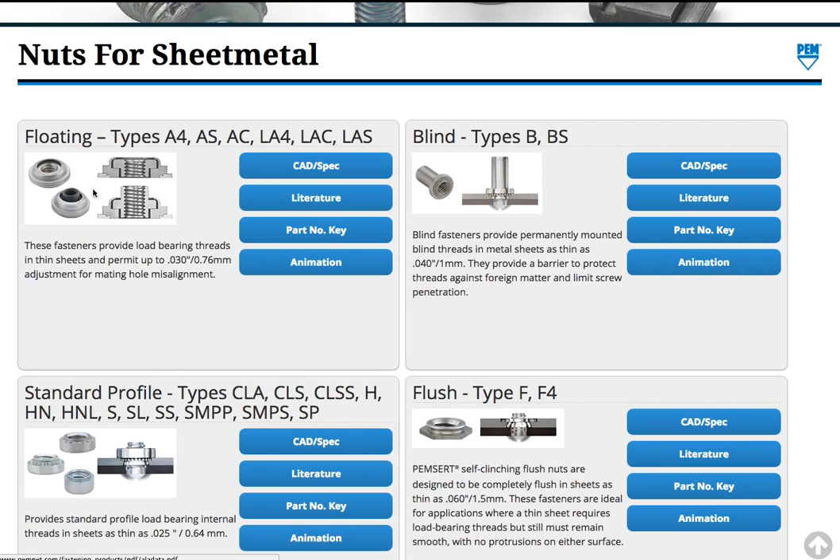And then these are floating. I know I'm rambling on fast, but there's a lot to cover, and you should just go and explore for yourself. But these floating ones are more interesting because they give you some wiggle room.

As you can see here, they can go in thin sheets. I forget what they qualify as thin sheets, but they permit up to 30 thousandths adjustment. That means when you line up your pieces of sheet metal, nothing in life is perfect, so when you design something, there's always some kind of tolerance. This allows you to be off in your tolerance by up to 30 thousandths.

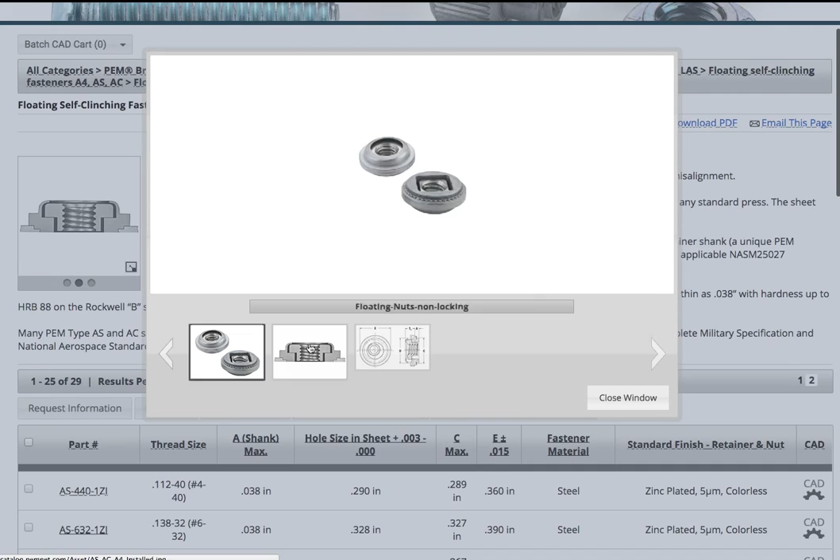The nut actually kind of wiggles around inside of this. So if I open this up, go in here, go into the unified section for the English stuff - I don't know how good of a picture it shows, but there's kind of an air gap around. This outside shell gets pressed into your sheet metal, and then inside, this can wiggle around by this much in all directions.

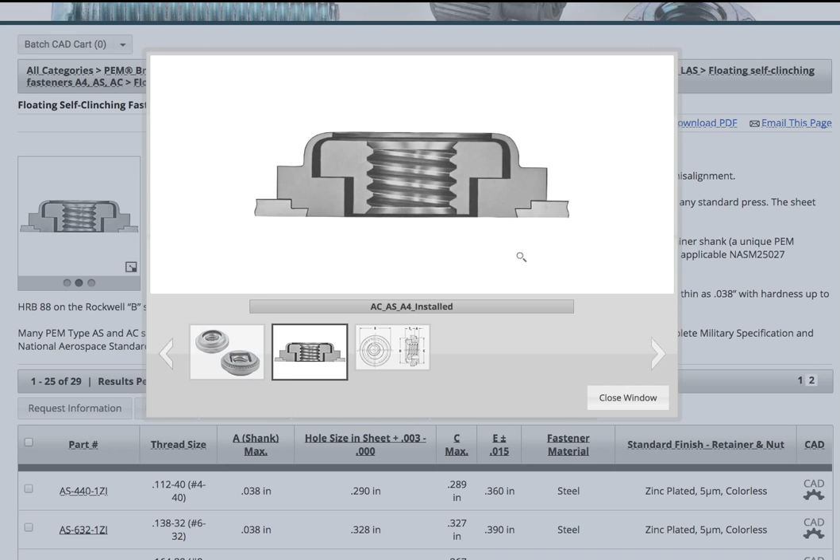So your tolerance can be off by a little bit and you don't have to worry about it. That can be a big concern if you're putting standard PEM nuts everywhere and you have a bunch of them far away - if something's off, some might not line up, and then you're kind of screwed. With hardware, it's a little looser because you might make your holes significantly bigger than you need, just to take care of any misalignment issues. But with PEMs, you can't do that. With these floating types though, it gives you some wiggle room. So they're pretty neat, just wanted to point them out.

Flush mounts are going to be perfectly flush with your sheet metal, which, as you can see here, sometimes you might not want something protruding up. As you can see, this can protrude up a good amount.

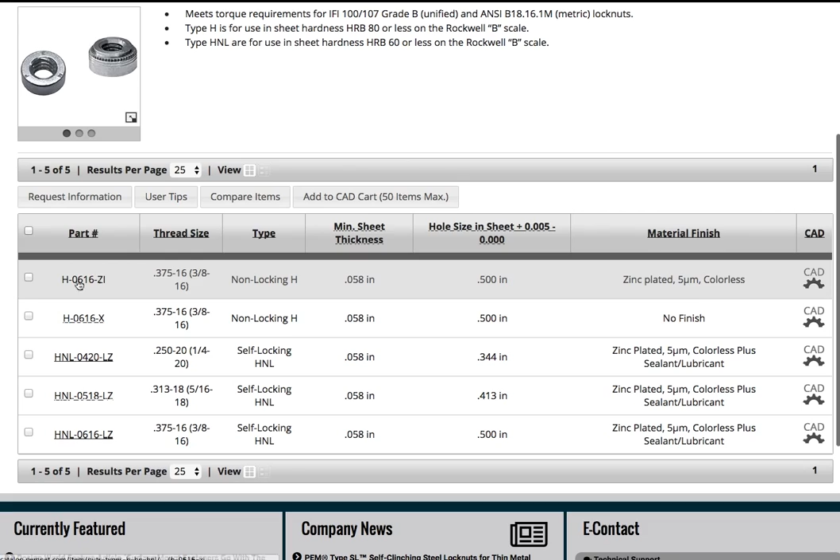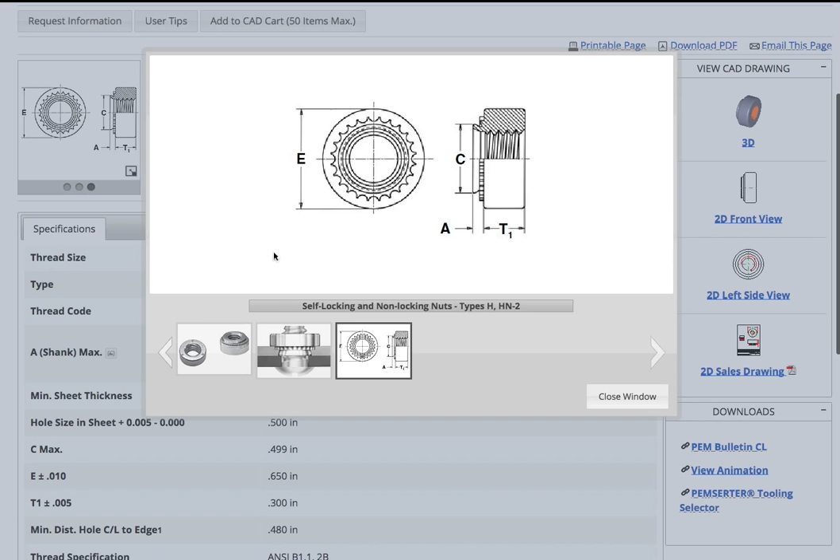If I go into their actual CAD stuff, go into the English system, and pick this one here - they give dimensions for everything. So if I open this up, this part gets pressed in, but this T1 dimension is actually going to be protruding up here above your sheet metal. If I go for T1 down here, that's 0.3 of an inch.

So it depends on what you need in your design. But if for some reason you can't afford to have that protruding, then you're not going to want to use this type - you're going to want to go back to the flush type. Go to F, go to unified, let's pick one quickly here. And they're going to be flush.

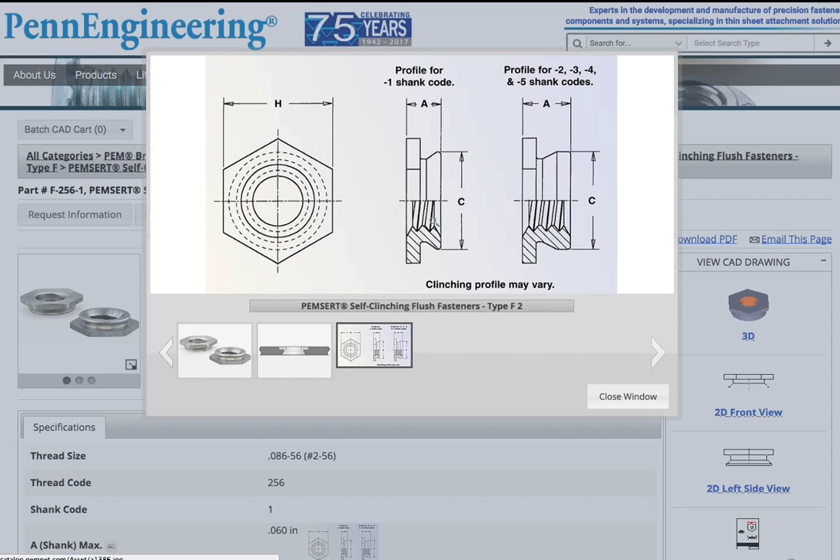You can see all the different dimensions here. Every single PEM is rated for some kind of sheet thickness, so these can only be used in sheet metal from 60 to 91 thousandths. And they give you a hole size that you have to mount it in, with some tolerance and stuff.

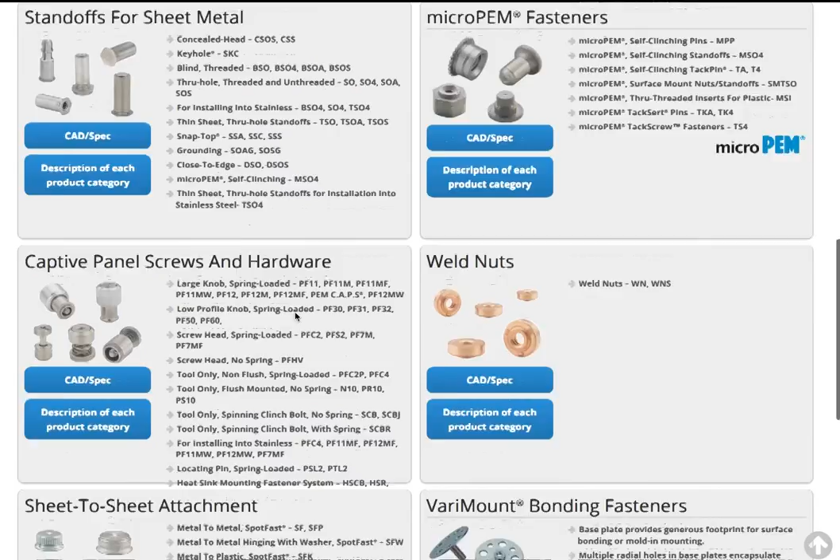You have a spring that presses your actual screw away. So if you want two parts that are mating and you want a thumb screw, and you want the screws to stay in there and not come out every time you take apart your assembly, this is a good option. You could make an assembly like this yourself, but this is an easy buy-it-and-forget-about-it solution where you're just press fitting these into your sheet metal, and now you have everything captive - this takes care of the nut, this takes care of the screw.

Now it's a little different. Again, I'm getting into the details here, but you need something to thread into for whatever you're threading into.

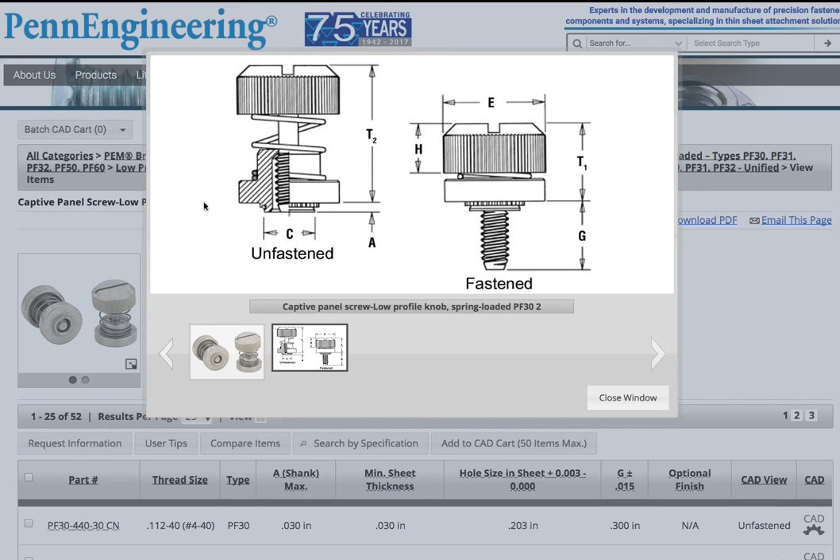Like you're going to have this in sheet metal, and there's going to be another part that has threads. Otherwise, this is doing nothing. But it's a pretty simple solution where if you need a captive threaded part, that's one thing you can do.

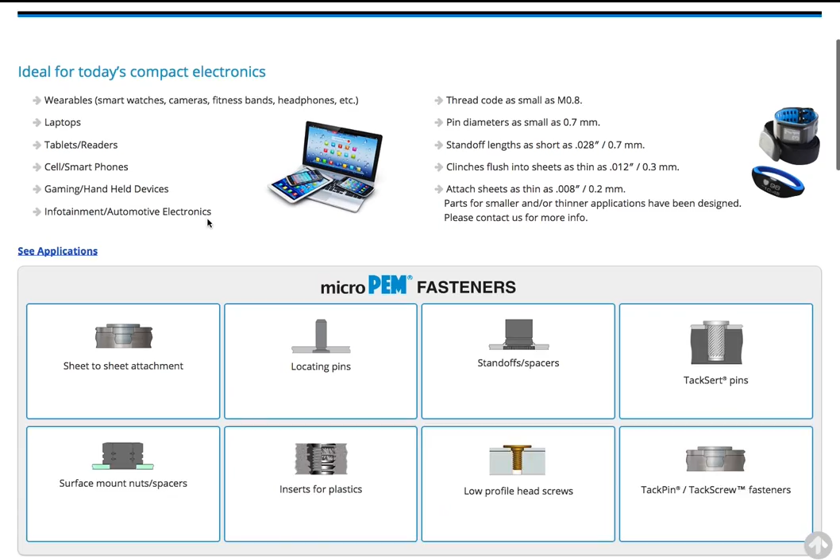I'll show you some of their other products here. They have these micro PEMs. I've never used these ones, I usually just use the regular PEM Fasteners, but these get even smaller. So I'll just go to sheet attachment, pick a random type. I don't know, I guess I'll just pick these, and I'll pick the first one.

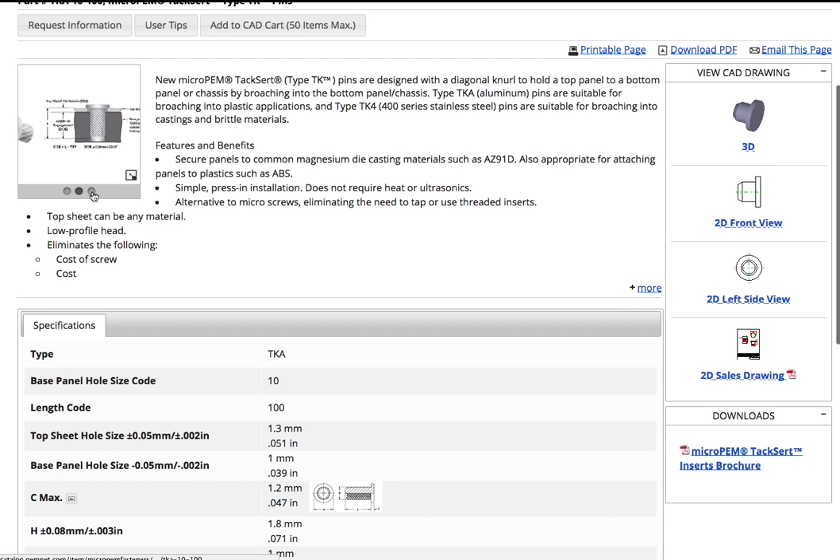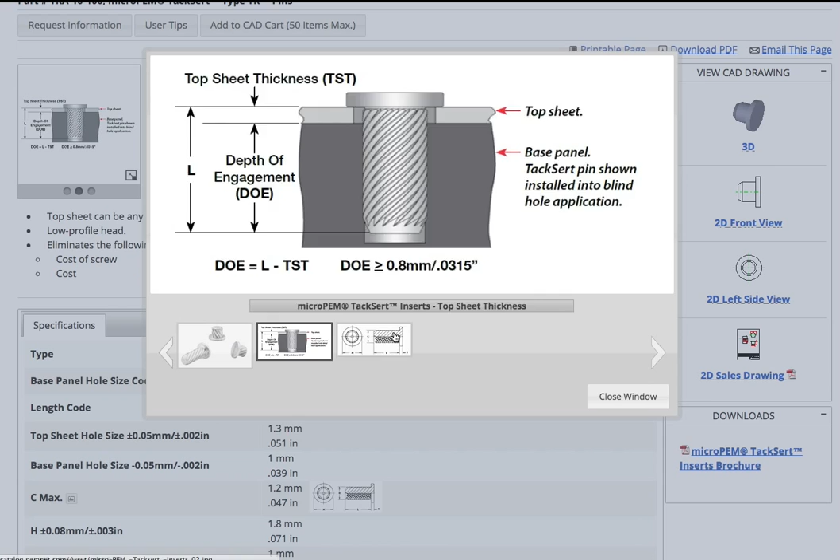So if I go into the pictures here, look up these dimensions. I kind of want to get a rough size of how big this thing is. So L is... actually, sorry, L is the actual length of it getting embedded. And then we have this part here.

Let's scroll down and we see that the L dimension is... it's actually kind of amazing. It's 40 thou, it's 1 millimeter long. And the H is 71 thou. So that's really small. If you think of a number 4 screw, what is that? 0.112, I forget the number, but this is teeny.

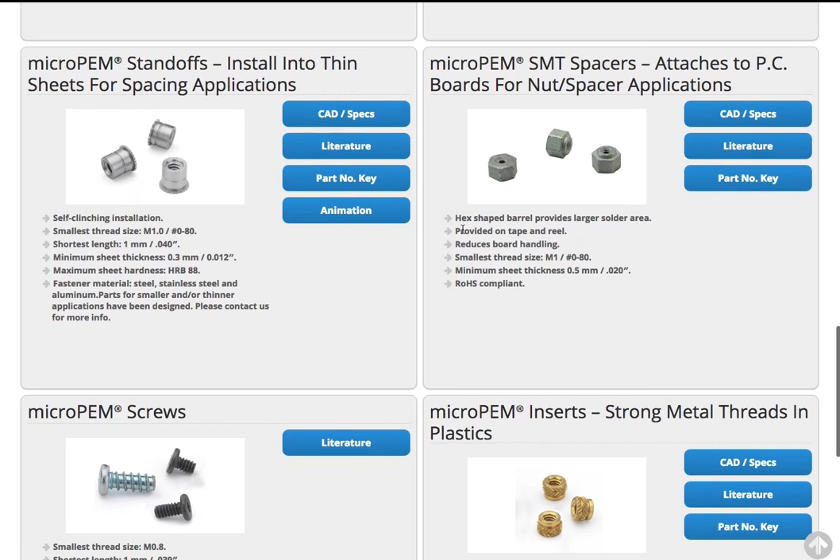If I go back, they have all these different essentially nuts, with different applications. They have screws, they have these inserts. And then up here they have this Atlas brand. Let's see, what are these? I've never used these ones either, but they just have a bunch of different products.

I think they have some of the companies they've bought, like these plastics components, where they bought this company or merged with them, and now they do them. They have a ton of different resources in here that go outside of just showing how they mount. They have this information, they show you how to design them, or design your system to actually use them.

One advantage is you have fewer parts to handle, fewer assembly steps, less assembly time. So those are kind of all related. If you have fewer parts, you're going to have fewer assembly steps and less assembly time. But that's really what these things are great for.

Whoever's making your part, you just tell them, hey, put a PEM fastener in this spot. And you'll get your sheet metal part shipped to you with a lot of your hardware pressed in, which is great.

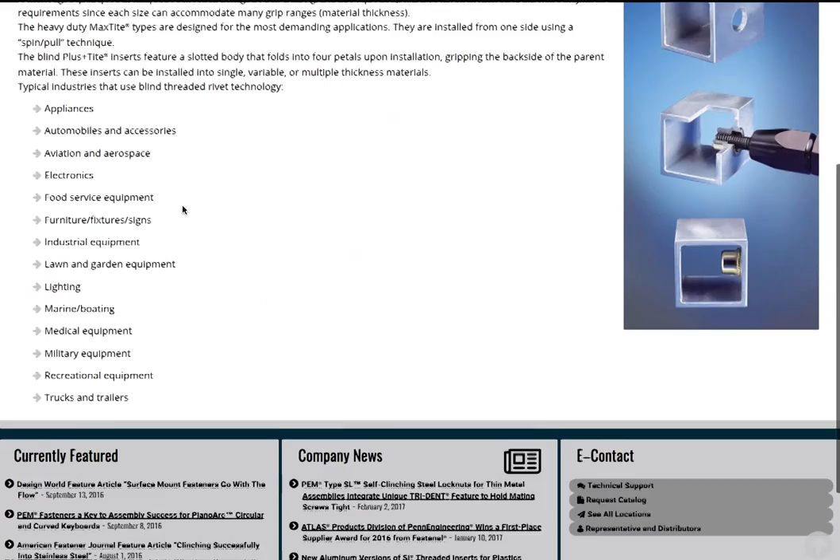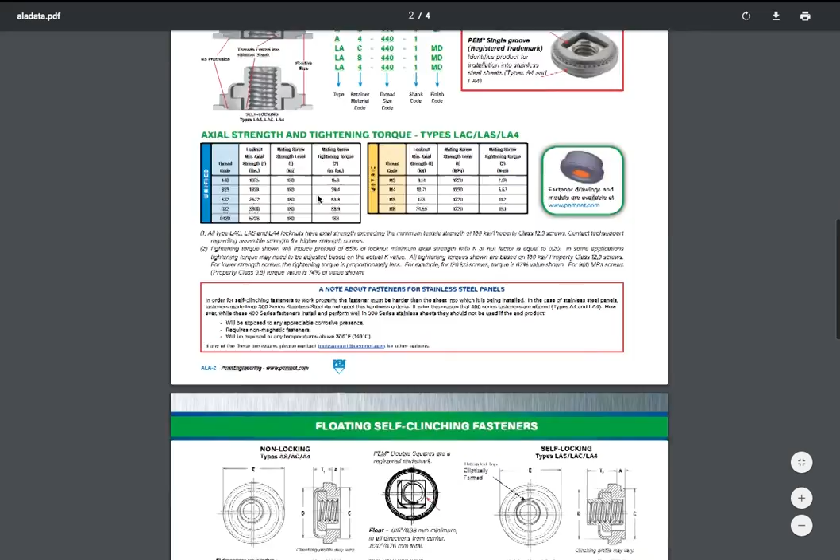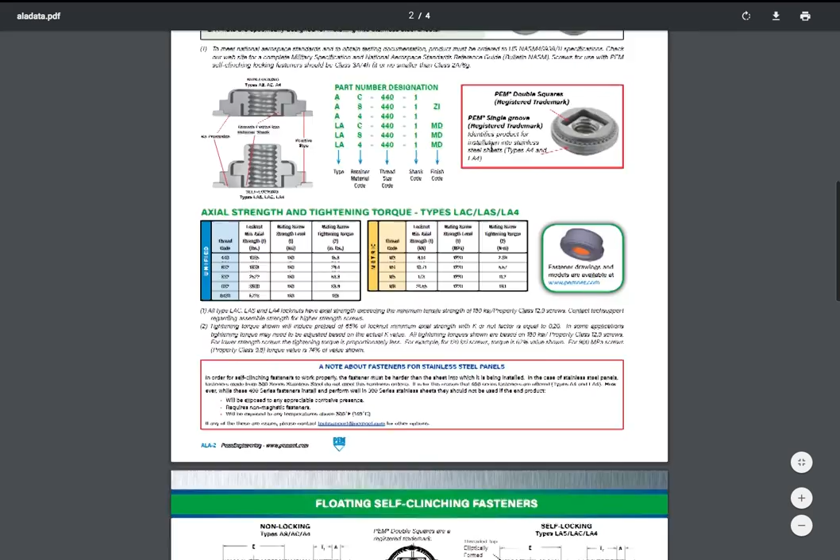They show some applications, and around here they show how they're actually inserted or drilled out. In literature, they have boatloads of catalogs and information. This was particular to floating self-clinching fasteners, and they go into a lot more detail in terms of the visuals here. It reads more like a book, whereas the website reads more like a website, as you can imagine.

Yeah, so that's pretty much it. I just wanted to show you, potential future design students or people who have to do design projects in school, that when you're handling sheet metal part assemblies, you don't have to just use standard hardware. You can use these PEMs.

They might have more detailed design stuff somewhere, you can go online and Google it. There's different things to take into account. Like you don't want to have these things too close to an edge because you are deforming the metal around these parts. You don't want to have them too close to a bend in your sheet metal. It depends when they're installed, before or after bends.

Whoever's making your part will generally handle all that, but there are certain distances you want to keep these things away from, because you could end up deforming a hole. You put them too close to a hole, you press these in, and now all of a sudden your hole gets warped a little bit. Or you have them close to a bend, then you press them in, then you bend your part, and now your PEM's at an angle if they installed it in some order that wasn't perfect.

And it depends on who's making your part. Generally, if you have someone reliable, some company, they're going to look at your drawings, and if there's something wrong, they're going to call you and say, hey, I was looking at this, I was about to do this, and that's not going to work, or it's going to come out crappy. Because they want you to be happy with what you're paying them or your company's money for, since then you'll be more likely to use them. So hopefully you're working with someone who can help you out.